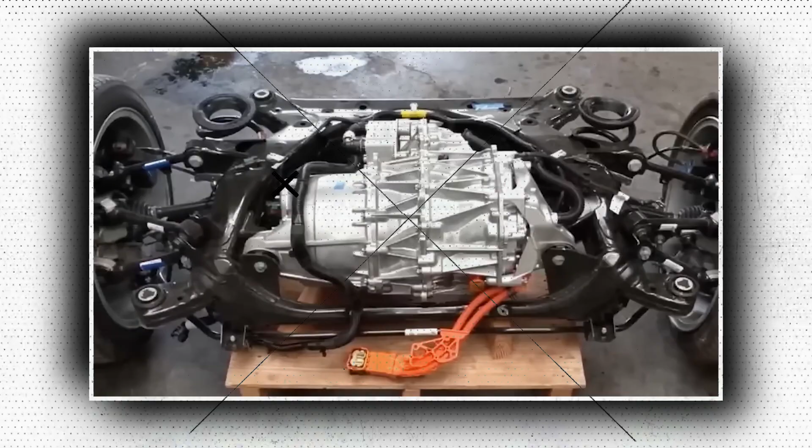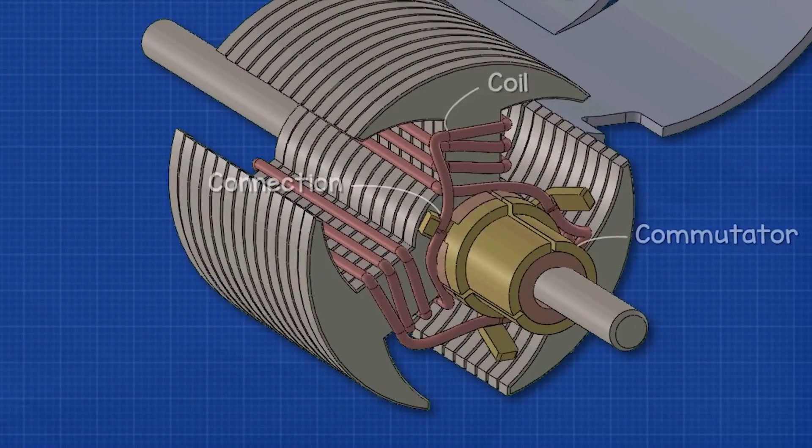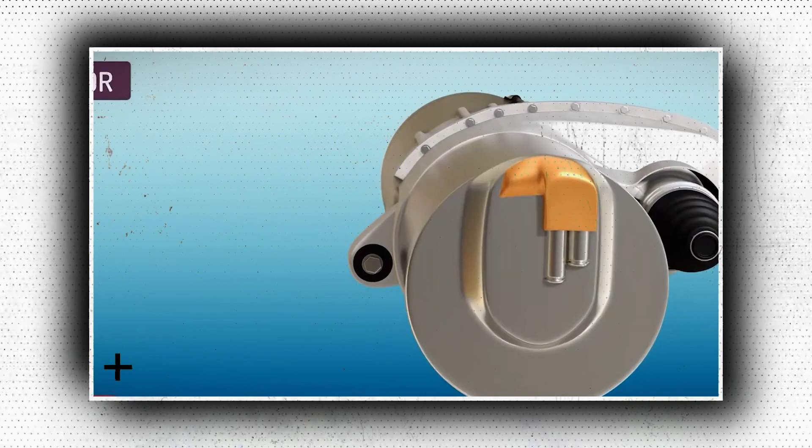Stay tuned. A new design for the motor generator and the remainder of the powertrain's components will be used in Toyota's new line of electric motors starting in 2025. The transmission, the inverter, which has power electronics to manage both alternating and continuous current, and the software that unifies everything together make up the overall system. According to Sato, the set has a format and set of standards that are better than those that any other automaker could create on their own.

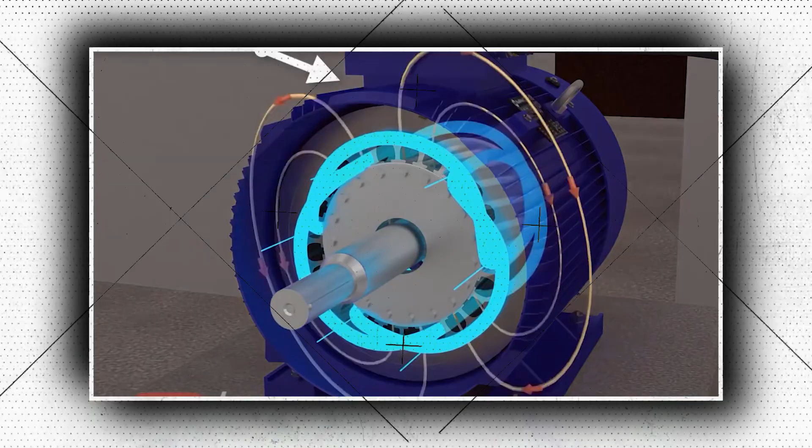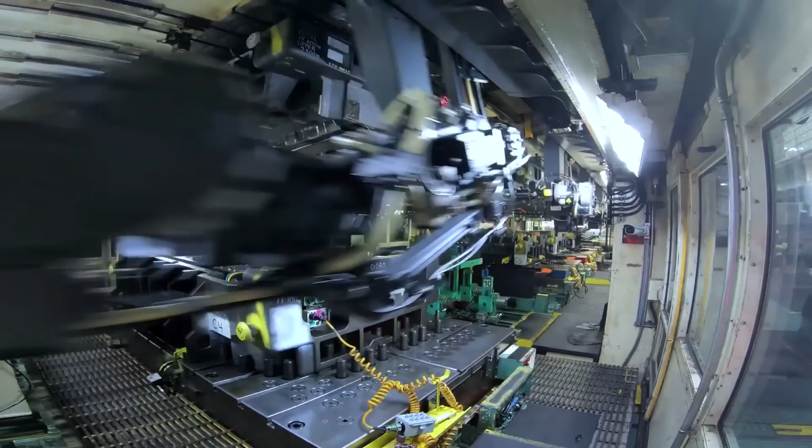Toyota has demonstrated its commitment to electromobility by establishing a new internal division focused only on electrified transmission lines. This demonstrates Toyota's commitment to the development of electric powertrain componentry. The features being given for 2025 are the outcome of this work, which also decreased the development of internal combustion engines, because it is a field of endeavor that will undoubtedly stop being profitable in the upcoming years.

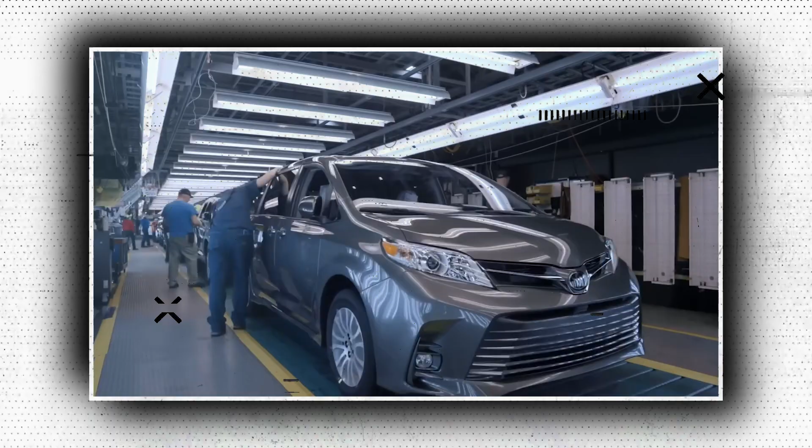According to Toyota, its new engines offer better energy density compared to the current generation since they are more efficient, compact, and lightweight, as well as more sustainable. They can also be produced more cheaply than electric motors made for one specific purpose thanks to their scalability. The integrated powertrains made by Toyota are capable of handling many different jobs.

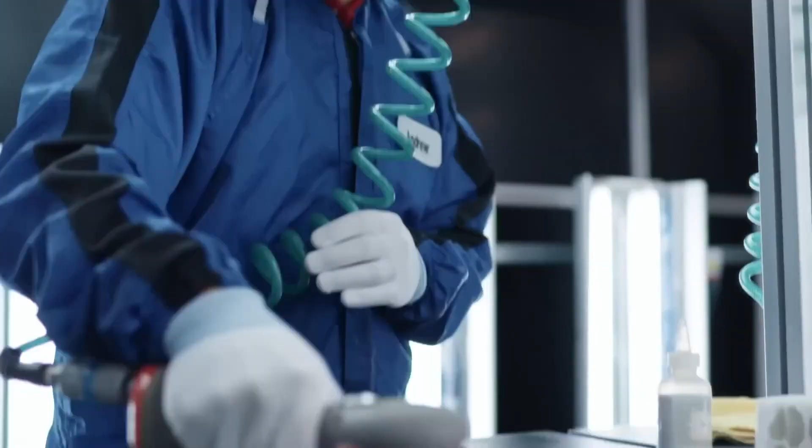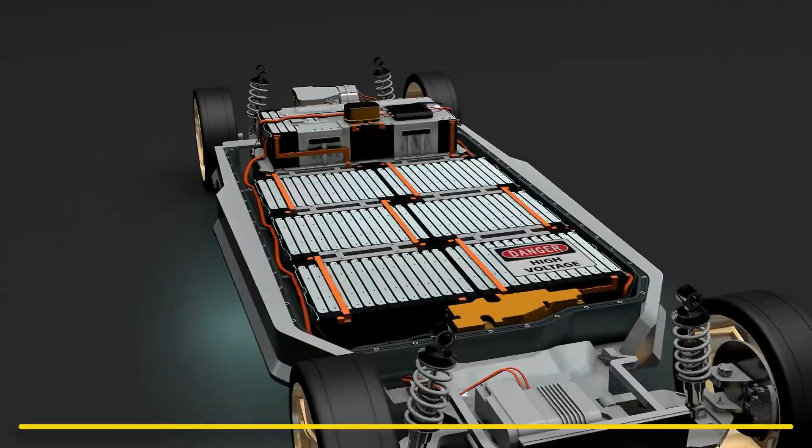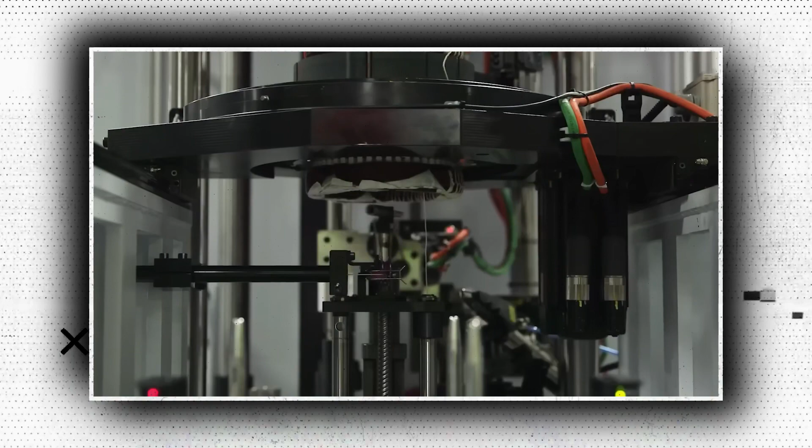In dual-motor electric vehicles, they have a secondary output of 134 horsepower and a primary output of 402 horsepower. Toyota focused on cooling and copper winding design, both of which are novel compared to existing systems, to meet these requirements. Permanent magnet motors, asynchronous motors without magnets commonly referred to as induction motors, and externally excited motors are the three motor technologies the company is currently working on.

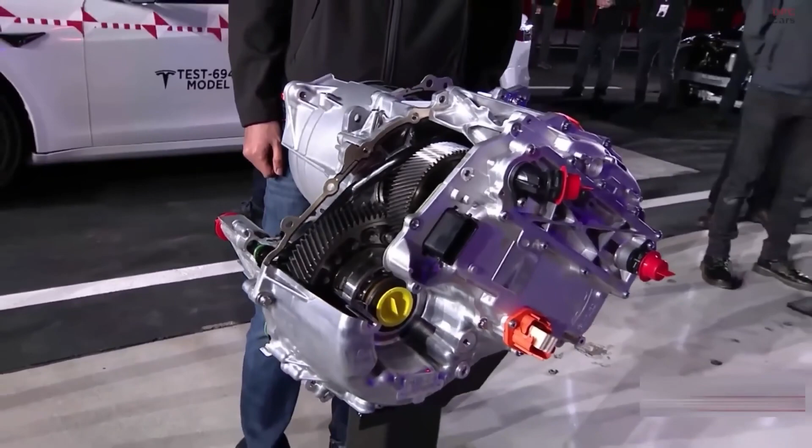In the case of permanent magnet motors, the rotor, the rotating part, maintains the customary properties of this element, with the magnets right on it. The stator cooling water jacket, which houses the copper windings that produce the magnetic field in the magnets, is where the distinctive feature is situated.

The Toyota EcoFluid, a dielectric refrigerant oil that does not conduct electricity and comes in direct contact with the windings, is carried within via a few grooves. Because of this system's excellent performance regardless of temperature, the motor can handle a wide range of power characteristics while significantly cutting down on losses. Through more effective operation, this keeps the engine from overheating and increases its lifespan.

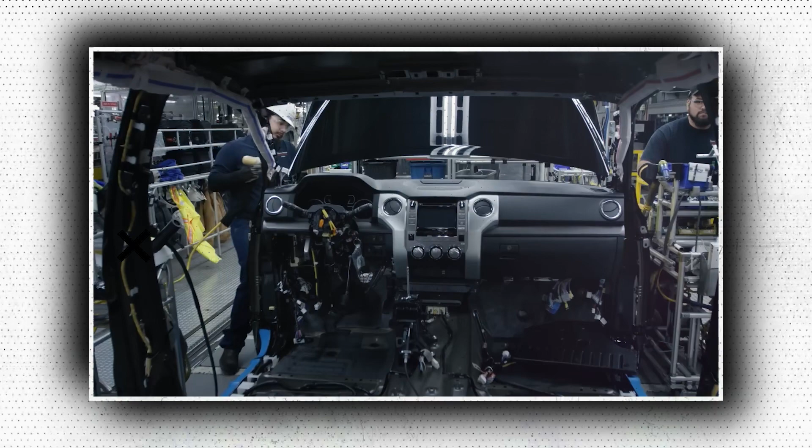Furthermore, Toyota claims that its technologies are up to 14% more efficient than current drivetrains. They also have cheaper production costs than a powertrain designed for a single application due to their scalability, which enables savings in complexity, investment, and manufacture.

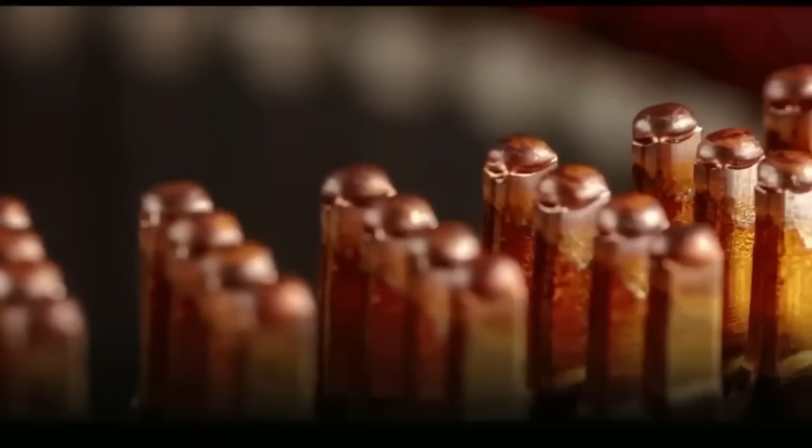The winding's shape has also changed, departing from the typical hairpin type that gets its name from the way its component wires look like hairpins and are connected by a large number of solder points. There are only 24 solder points on these twisted windings, which were created in a single process. A smaller, 15mm rather than 28mm, winding head is used to create the joints.

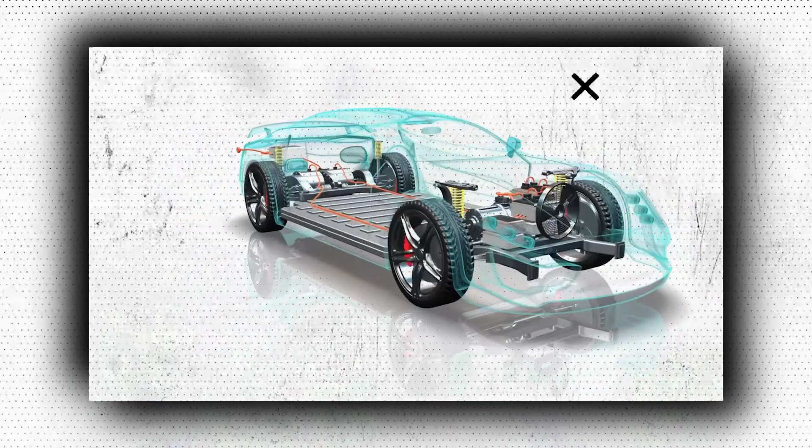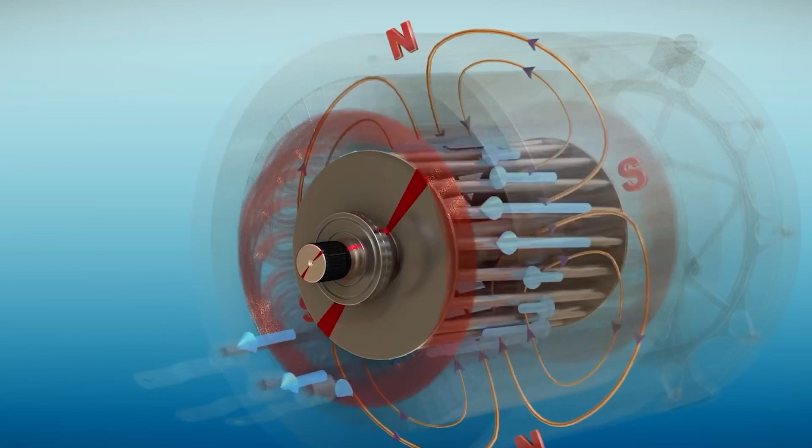The engine can run constantly and more rapidly thanks to cooling, reaching 85% of its theoretical maximum power. Likewise, the heavy rare earth elements in this design can be lowered to just 1%, which makes it simpler to enhance cooling. In addition to increasing power and torque density and cutting down on the amount of raw materials consumed, the new winding design shortens the total length of the motor by 10%.

Quite different from the norm is the transmission design as well. In both the first stage and the second stage, the engine rotations are reduced. Afterward, power was routed through a unique differential to the wheels.

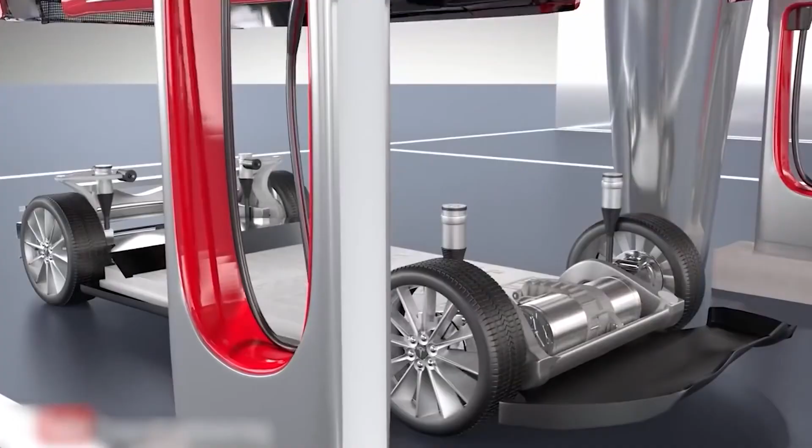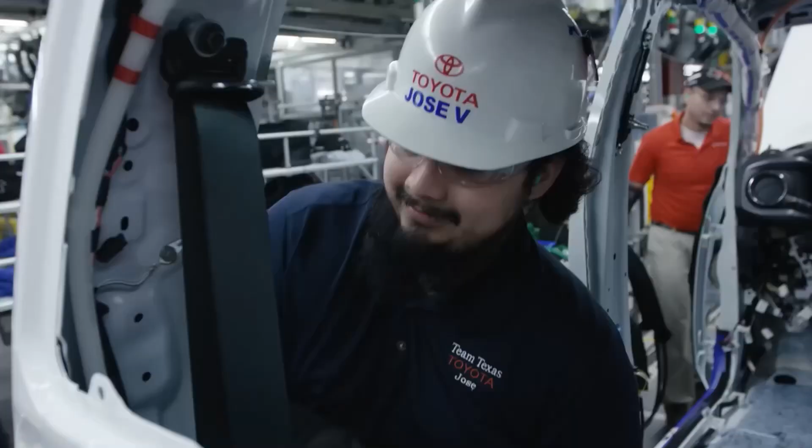A stack of two planetary gear sets, one inside the other, is now part of the new transmission, which also serves as a differential. The end product is 25% smaller, 10% lighter, and 20% less susceptible to transmission losses than present designs. At the same time, noise cancellation and other improvements are genuinely compatible with current technology.

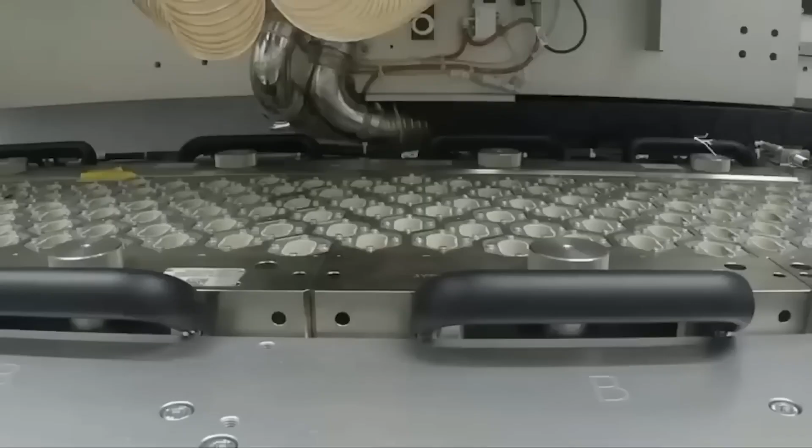Meanwhile, let's dig deeper into hairpin motors and the technology behind it. Electric vehicles are using more and more hairpin motors. Compared to earlier varieties of electric motors, they are easier to construct, more effective, and have higher power densities and thermal performance. What is a hairpin motor?

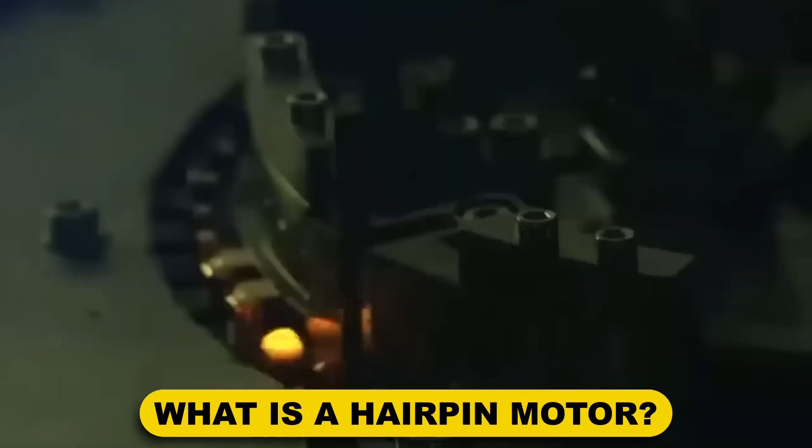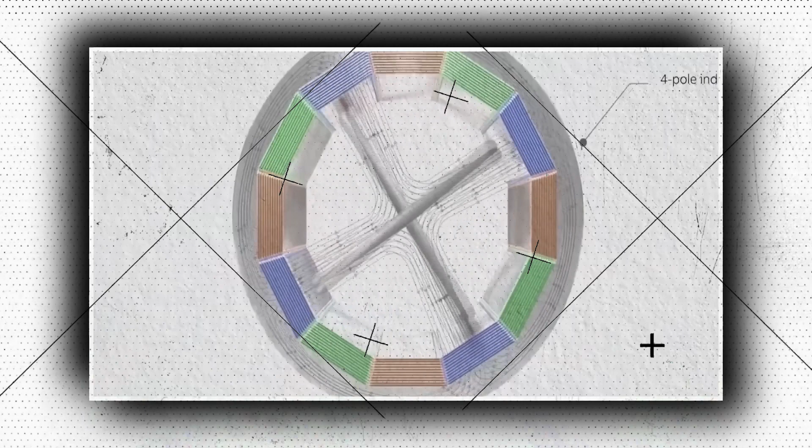Electric motors that wind their stator using hairpins rather than round wires are known as hairpin motors. In comparison to wires, hairpins are rectangular and big. The copper winding is more efficiently used, about 20% more efficient, due to its rectangular shape, which allows for a superior fill factor. There are numerous advantages to hairpin winding technology.

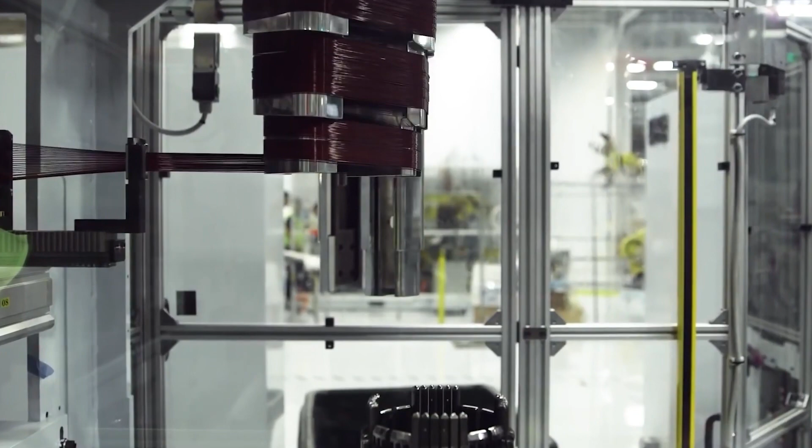The additional copper produces a stronger magnetic field because the fill factor is better. This permits a stronger rotor rotation and more torque at the wheels. The stator can be smaller with a better fill factor.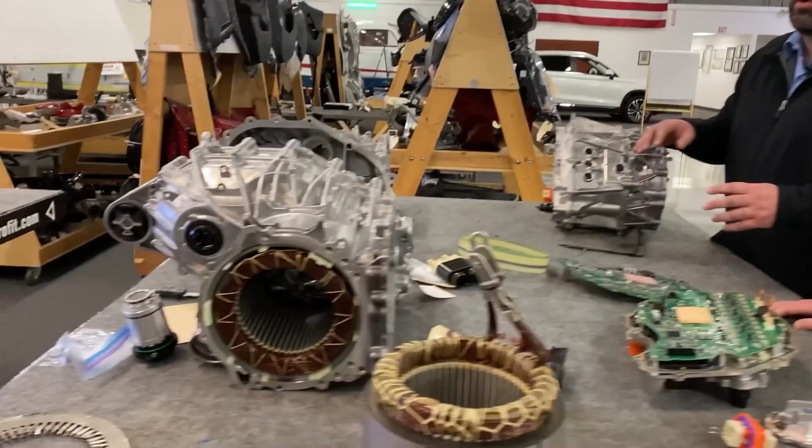Copper losses, or the amount of energy lost as an electric current passes through copper, are negligible. This is caused by the optimal winding path, which has winding turns that are all identical and symmetrical in shape. The electric motor can generate the same amount of power while using less energy, which helps increase the vehicle's range.

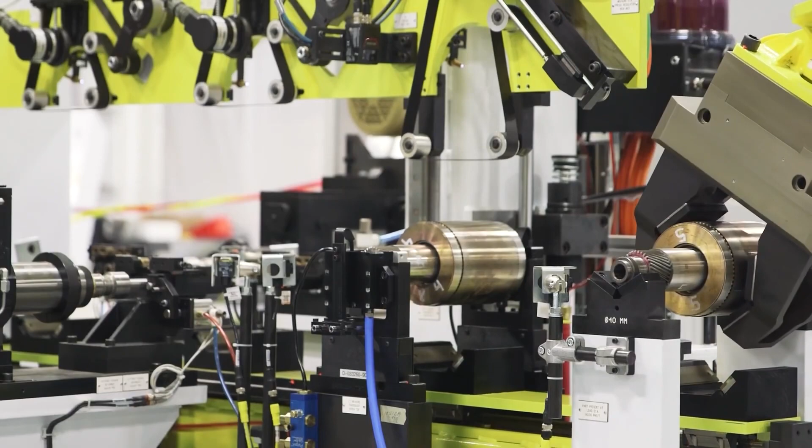Hairpins are more simple to wind than round wires because of their symmetrical design and solid design, which greatly simplifies installation. Stitch cords are required to hold the wrapping of round wires together, a procedure known as stator lacing. Hairpins don't need to have this.

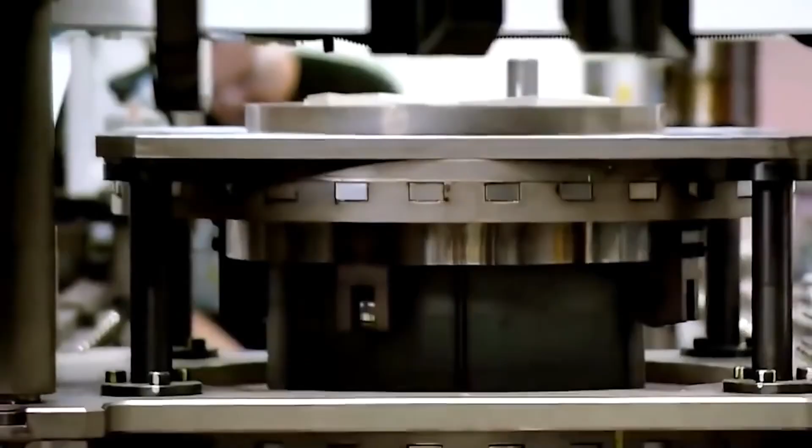Long-term failure rates for hairpin motors are lower. This is because vibrations have less of an impact on their bigger, stronger conductors. Round wires cannot carry as much current as hairpins.

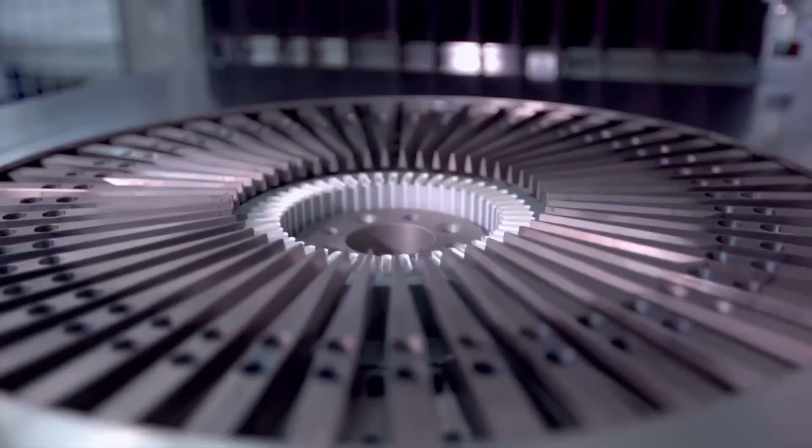With more efficiency, the winding and the motor produce less heat. The motor's dependability and longevity are increased, and temperature regulation is made simpler. Hairpins can be placed precisely, which makes for a more cleaner look than round wires can.

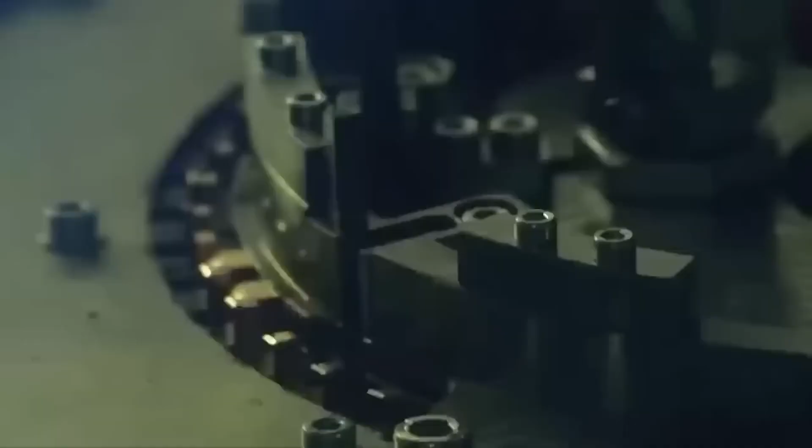The installation of the hairpin technology has significant challenges in ensuring functionality, notably in traction drives. The most difficult procedures in this regard are those involving bending and welding. When bending, strict specifications for damage-free insulation and precise geometry must be met. Up to a non-functioning stator can result from improperly welded hairpins, which ends in electrical losses.

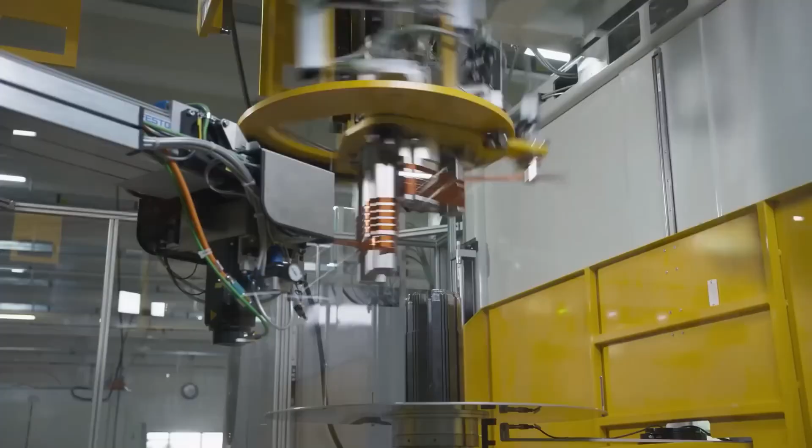Why isn't hairpin technology more popular? Primarily because the production procedure for hairpin winding is extremely complex. Before being automatically put into the stator core slot, the wire must first be bent into a hairpin shape. After that, the ends need to be twisted and joined.

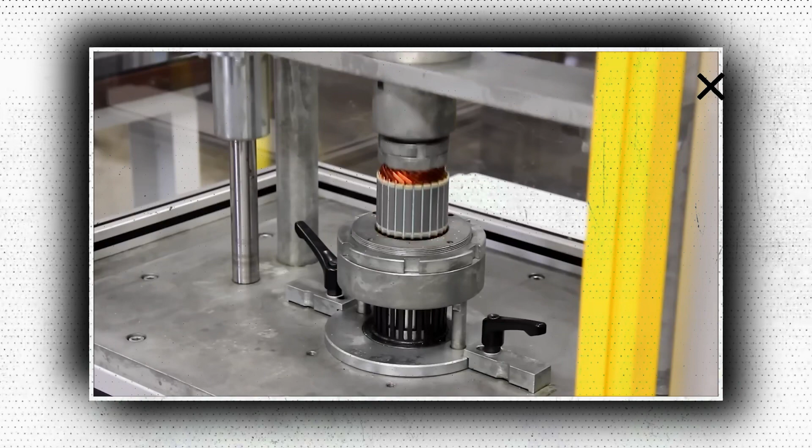So it is impossible to manually produce hairpin motors. Building a highly productive production line for these motors needs a considerable investment.

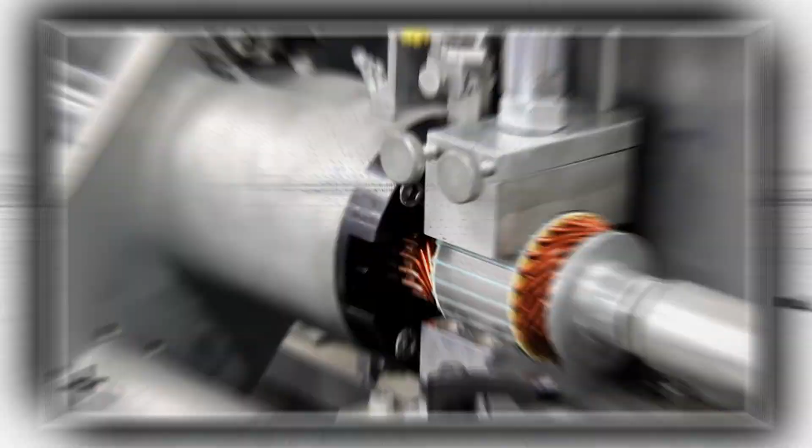Never underestimate 1%. Comparing a motor with hairpin wiring to one without, this technology improves an electric motor's typical efficiency by more than 1%. The fix is only 1%. Nevertheless, do not undervalue 1% because it offers a number of important advantages.

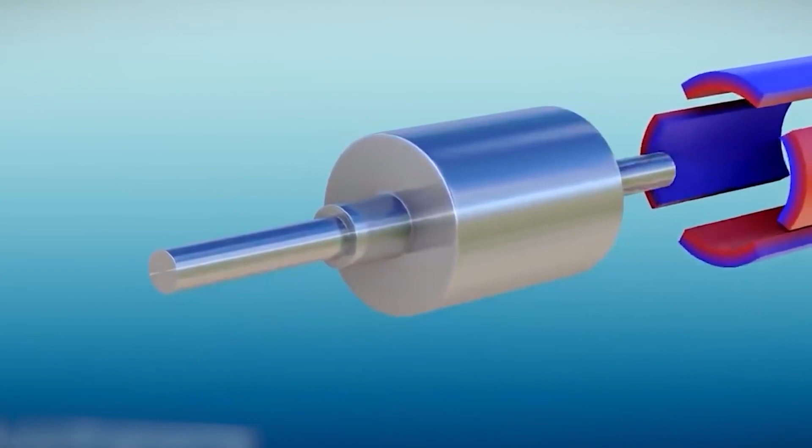The maximum efficiency zone size is expanded in the first place. This implies that you can drive efficiently at both high and moderate speeds on the highway, even in congested urban areas. More stator windings can also be fitted into the hairpin motor. This indicates that the motor can produce more power and torque with the same energy loss.

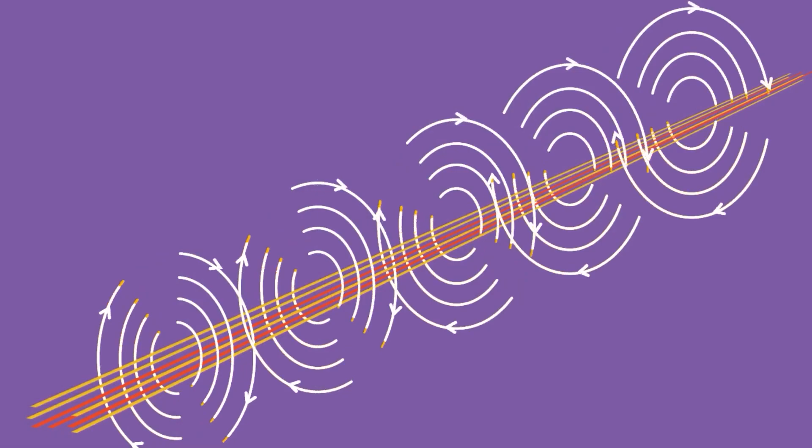Likewise, the flat wire utilized in a hairpin motor has a more symmetrical shape, which lowers the thermal resistance in the stator slot. The peak power and sustained performance are further enhanced by the improved heat transfer efficiency it provides.

And finally, but not least, the motor itself delivers better stiffness because of the winding's increased stiffness. A smaller slot can be used in the electromagnetic design, which lowers mechanical and electromagnetic noise.

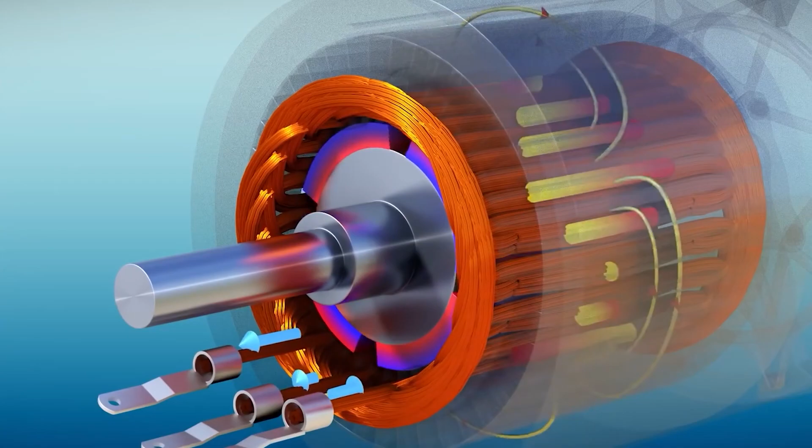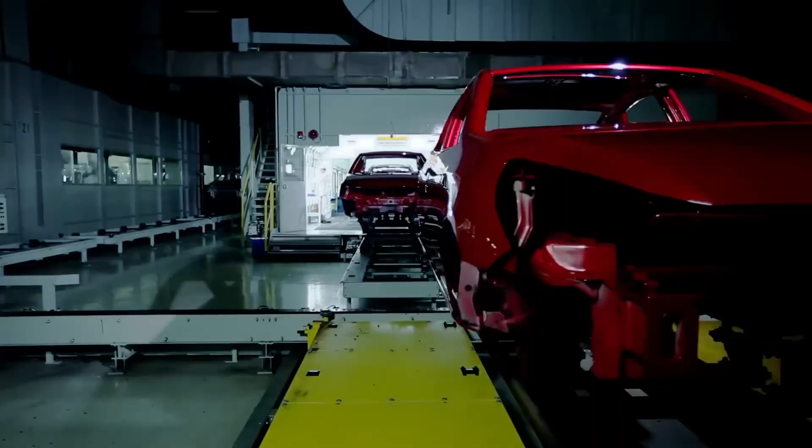Having said that, this is the tale of Toyota's latest generation of electric motors, which was created as a component of the major shift towards a future with more environmentally friendly transportation. It is unclear if they will be able to exceed Tesla and the other companies named at the outset, but in any case, it will be a fantastic benchmarking opportunity for all electric vehicle makers worldwide.